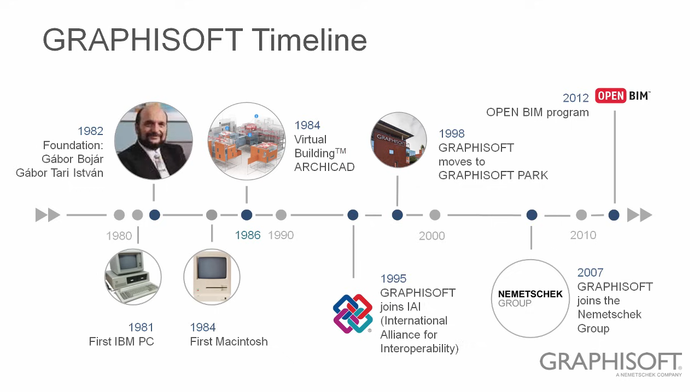This slide shows some important details in the lifetime of GRAPHISOFT. You can see the portrait of our founder, Gábor Bojár, who already in 1982, one year after the commercial introduction of the very first personal computer, succeeded to write a computer program for 3D modeling and clash detection on a PC. Soon after, our founder discovered that the best customers for his invention were architects. So ARCHICAD, the first BIM application for architectural design, was born. Only at that time, we called our method virtual building and not building information modeling.

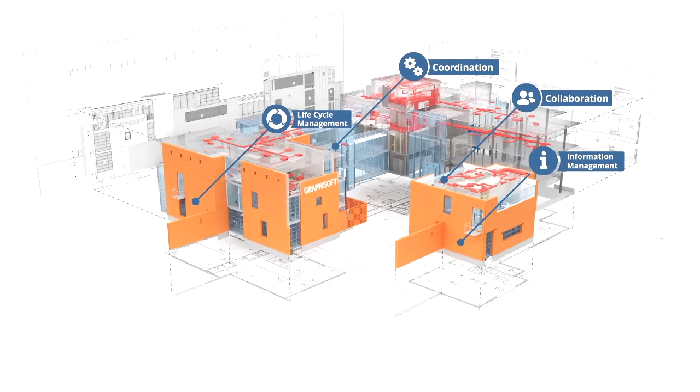What do we mean by BIM? What is building information modeling? Well, according to the AIA, BIM is mainly concerned with the digital representation of buildings, but also has many other aspects, like shared information, where you collaborate with different stakeholders of the construction project throughout its entire life cycle. In my presentation, I will try to cover all these aspects and show you how you can do building information modeling with GRAPHISOFT solutions.

GRAPHISOFT's solution ecosystem is all about building information modeling. ARCHICAD, our BIM authoring tool, is the preferred design tool of more than 200,000 architects worldwide. BIM Server and BIMcloud are solutions for smooth and intelligent collaboration for architectural design teams of any size. With BIMx, for BIM data access, our award-winning mobile application, even non-professionals can easily access and view the BIM models which were created by ARCHICAD.

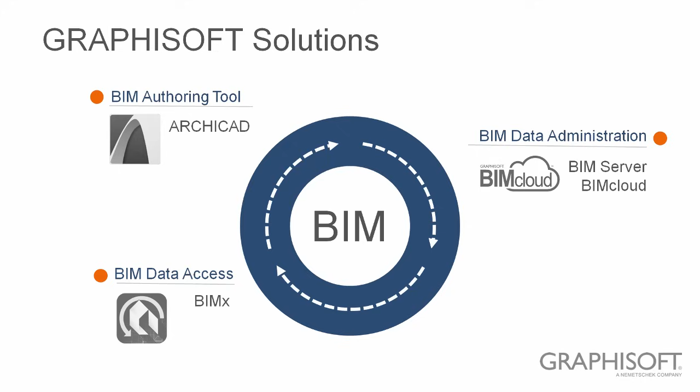Let me start my presentation with BIMx. You might have noticed I have already been showing you these slides in BIMx. BIMx is also a great presentation tool. You can freely download it from the App Store.

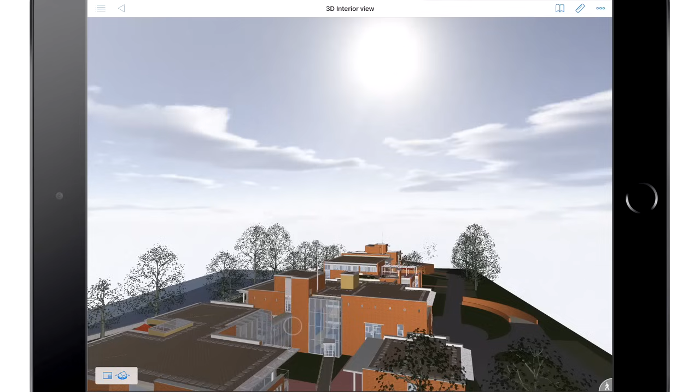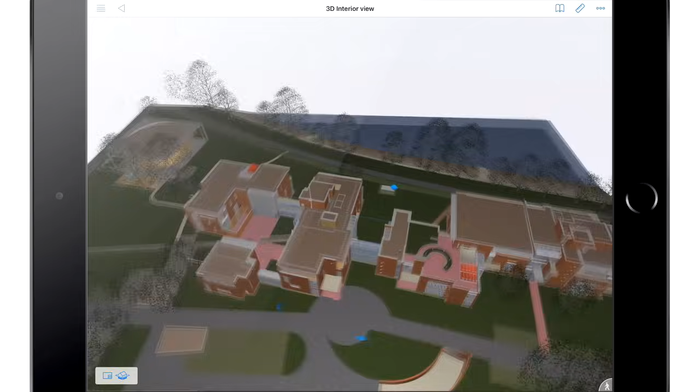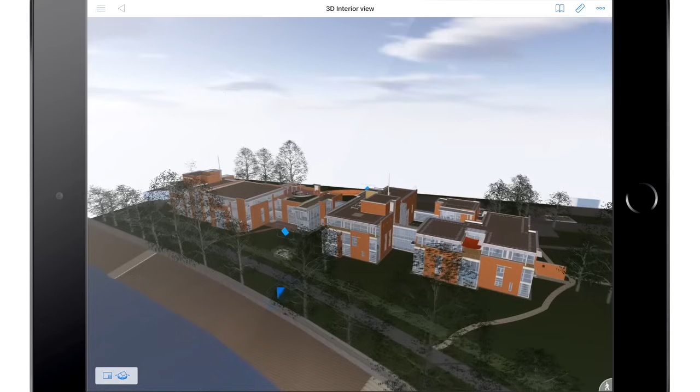I'm just switching to the 3D model to show you our headquarters in Budapest. These are the two buildings where all the software development of our superb products is taking place. The facility comprises two main buildings designed by two famous Hungarian architectural firms, Építész Studio and Lukács and Vikár Architects.

See how easy it is to visualize the BIM model and orbit around. With the pinch zoom, you can explore any detail from the outside or from the inside. Let's zoom a bit closer to the front door.

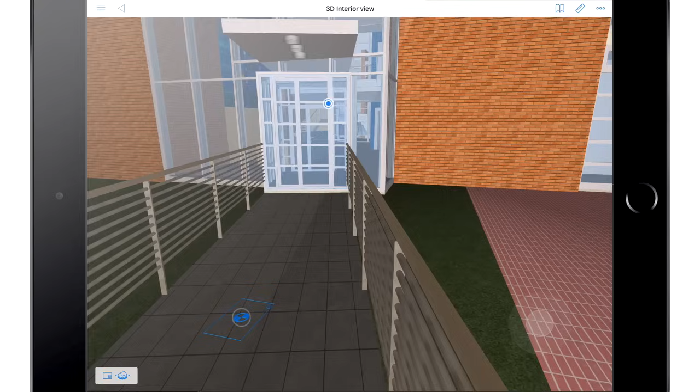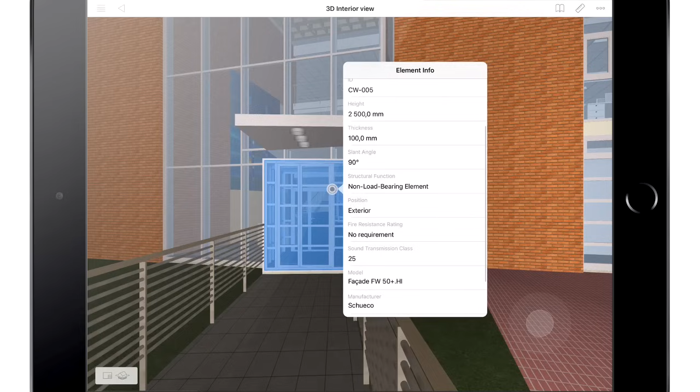Building information modeling is all about information. You notice a rich set of metadata can be attached to the model elements. Even web links can be attached to building elements in ARCHICAD. These can take you to the manufacturer's website for further information about the end product. These capabilities make the BIM model the perfect information management platform for the entire life cycle of the project.

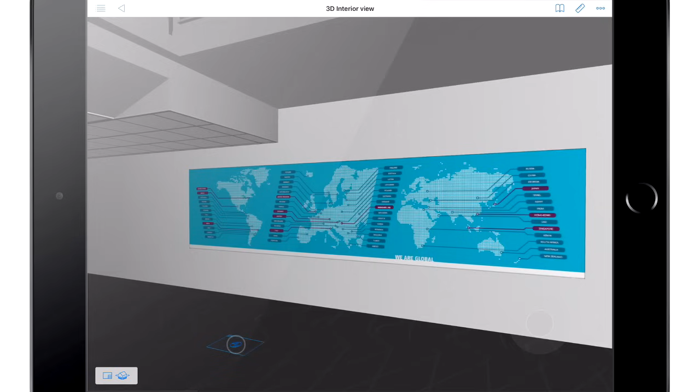Let's go inside the building. You can easily walk around just as if you were playing a computer game. This map shows all the locations in the world where we have direct or indirect representations. Let's walk upstairs. These virtual tours help clients better understand the design and get familiar with the relations between interior spaces.

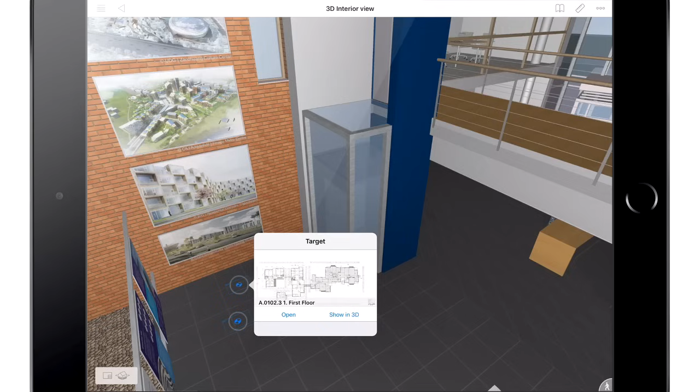Please note these great projects on the wall. All these buildings were designed with ARCHICAD by famous architectural design offices such as BIG, UDG, and others.

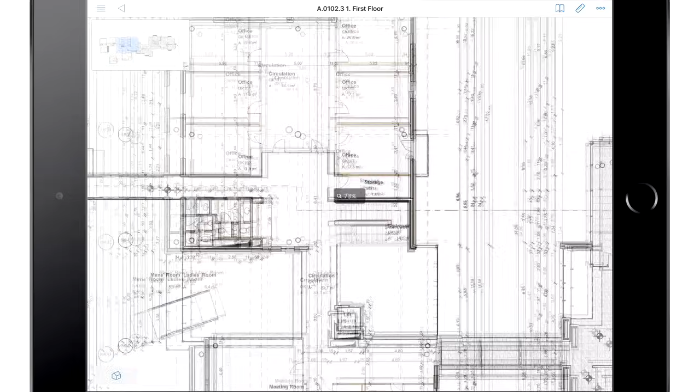Not only the 3D model, but also the entire construction documentation can be stored and viewed in our BIMx app. It means paperless construction sites. Construction managers can just walk about the construction site with an iPad in hand, having the entire construction documentation at their fingertips.

A unique feature of BIMx is that any 2D document can be placed in context of the 3D model, and the 3D model can be cut by the 2D document. This allows for much better understanding of the 2D documentation when viewed together with the 3D model.

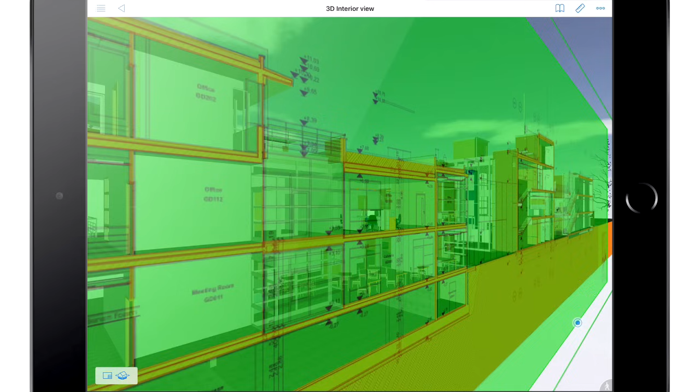In this section view, it is much easier for non-industry professionals to understand the 2D information when the section is placed across the 3D model. You can also move the 3D cutting plane to reveal the interior structure of the building at any location.

Now that you have seen how simply you can access and view the BIM model in BIMx, let me show you how easily you can create the BIM model in ARCHICAD. Firstly, I would like to show you that ARCHICAD is a true BIM authoring application. Then I will show you that ARCHICAD is very intuitive and you can have lots of fun while working with it. Lastly, I will give you everyday examples for how you can boost your productivity when working in ARCHICAD correctly, in the BIM way. Let's see now what it means to work in ARCHICAD in a true BIM fashion.

This is the same 3D view which you have seen in BIMx. We are just now in ARCHICAD.

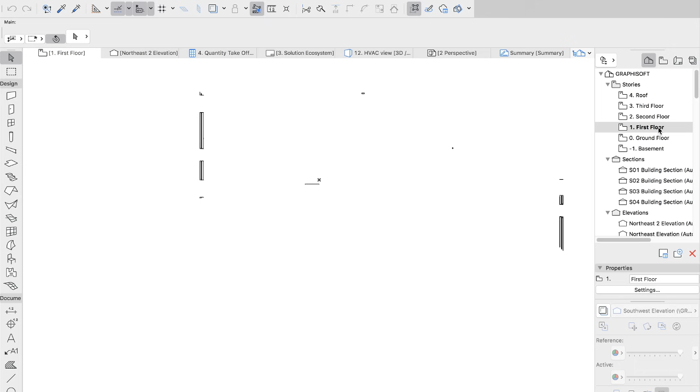Having a building information model in ARCHICAD means all the project-related documentation is stored within a single project file. The Navigator tool allows you to easily overview and access any part of the documentation. For example, in this case, I am browsing among the floor plans, sections, and elevations.

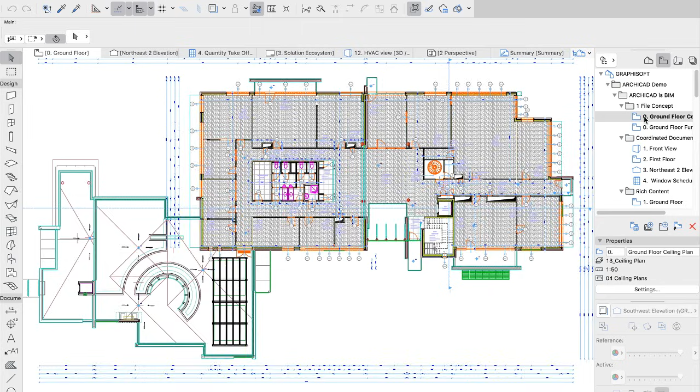The information and its graphical representation on a view depends on the architectural context. For example, the false ceiling plan has completely different content and style of representation than the furniture layout.

Navigator allows you to save and organize the different views of your BIM model in a fully customizable folder structure so that you can quickly access them at any time.

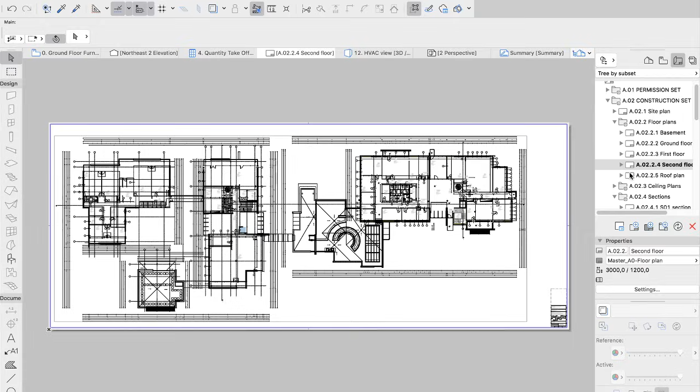Not only the building model related information, but also all the relevant drawings, schedules, and layouts are stored in the project file. All the drawings which make the architectural documentation complete are also an integrated part of the ARCHICAD project. In Navigator, the layout book lets you create and organize your final architectural layouts in any fashion you like.

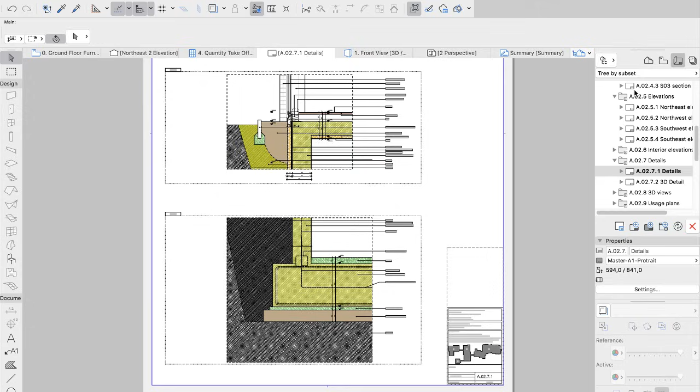The most important aspect of building information modeling is that all of the documentation, all of the different views, are live links to the central building information model.

Therefore, you need to make a modification just once in a view, and all other views update instantly. Your documentation stays coordinated at all times. Let's look at an example.

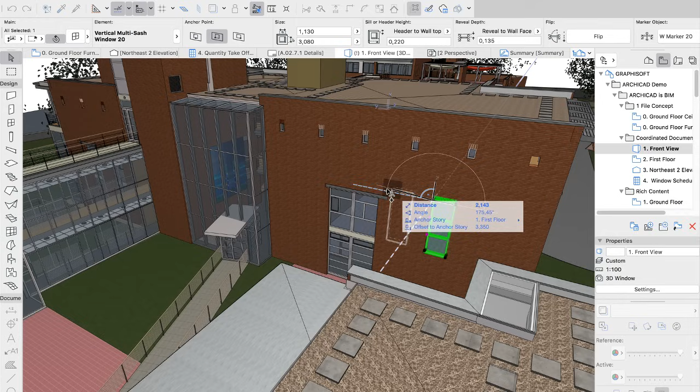You can modify the BIM in any view you like. Let's create a copy of this window right here in the 3D perspective view. As you can see, it is a very simple exercise. You can easily work accurately in the perspective view with help of ARCHICAD's guidelines.

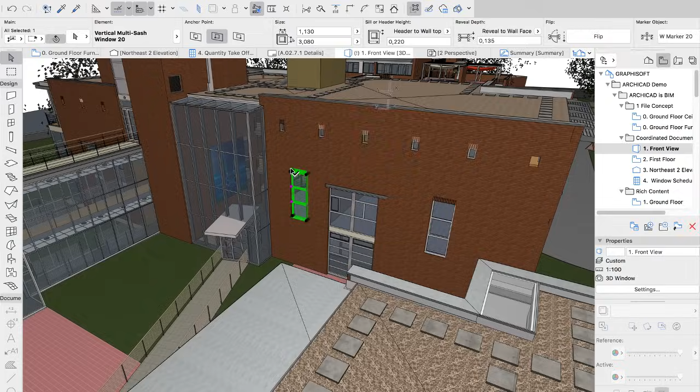Now let's have a look at the floor plan. As you can see, the window we duplicated in the 3D view is showing correctly on the floor plan. Let's see how easily you can further fine-tune this window.

Windows, doors, and objects in ARCHICAD are parametric library parts. One object can store a complete product range. They can represent plenty of variations of a construction element. You can comfortably edit the different window parameters through a user-friendly graphical interface.

Let's modify the number of window panes and the bottom pane height. Building information modeling means, in addition to the physical parameters, you can store a rich set of metadata with the building elements. For instance, in case of this window object, we can access its fire resistance rating, sound transmission, and many other important properties.

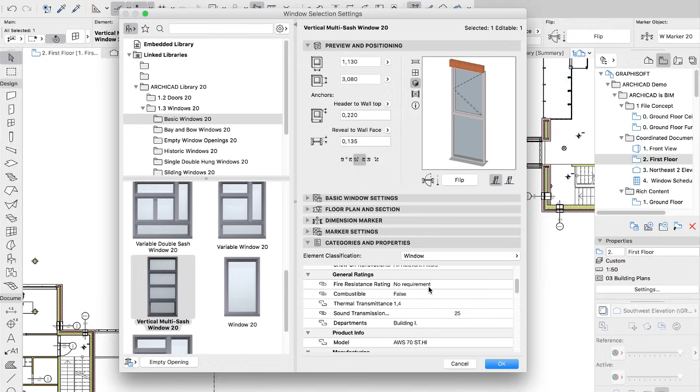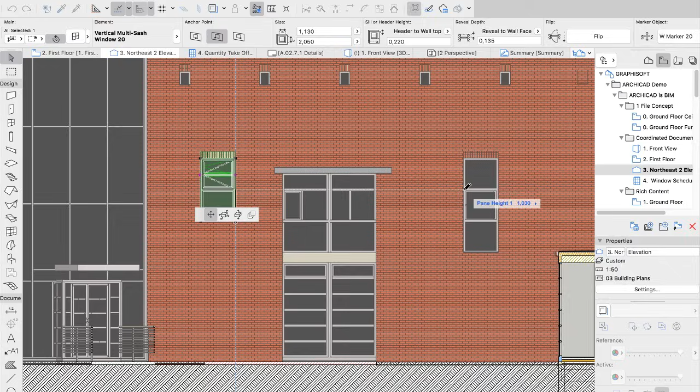The geometry of a window can be edited graphically in the 3D window or in an elevation view. For example, I can easily stretch the height of this window or change its transom height to align with the other. Graphical editing makes the use of ARCHICAD really enjoyable for architects.

At any stage of the project, you can instantly extract any information of the building information model as lists or schedules. Even graphic schedules can be created. Let's take this window schedule as an example.

Just like in any other views in ARCHICAD, you can edit the model elements also in schedules. Let's change the height of this window to be exactly the same as this other window, 3 meters and 8 centimeters.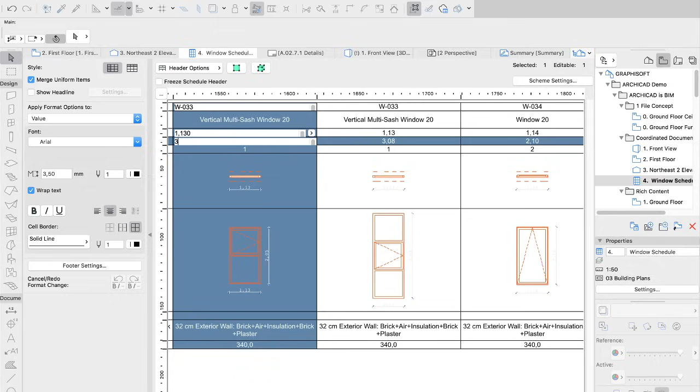Let's check our elevation. As you can see, the elevation has been updated and the window height has been changed.

You now probably realize how much time and effort can be saved by working in a real building information modeling fashion. You only have to build up your building information model once, and any changes you make will be automatically updated in all other views instantly.

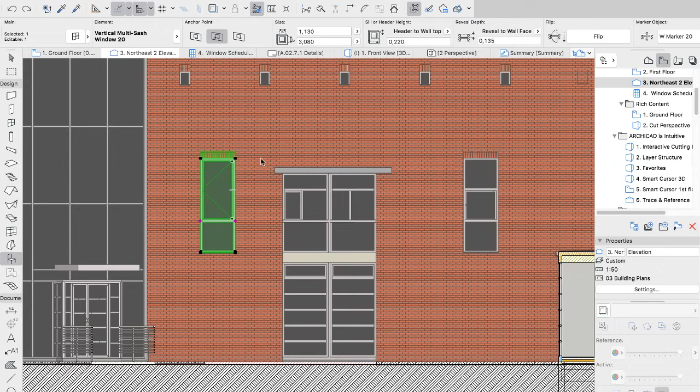ARCHICAD offers a huge productivity gain compared to traditional 2D CAD-based workflows. ARCHICAD significantly reduces the time spent on project modifications.

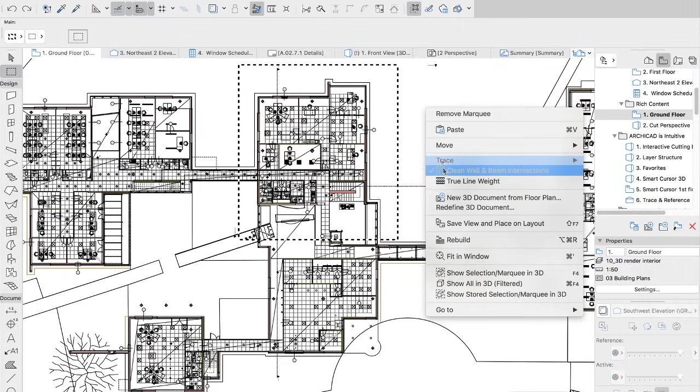Another important aspect of a BIM application is the type of local content that comes with the software, and how easy is it to customize these ready-made construction elements. To check this out, let's first visualize only part of this model with help of the marquee tool and furnish the entrance hall with some seating furniture.

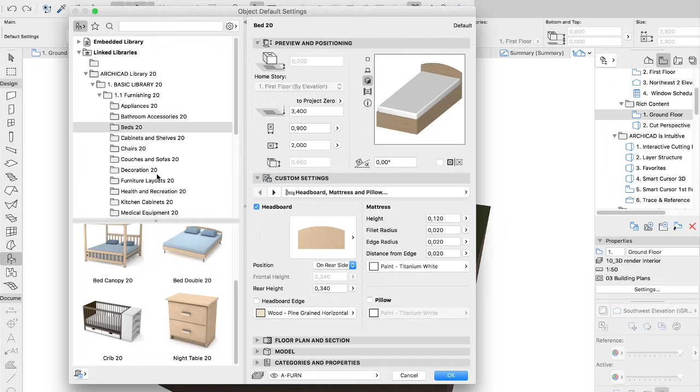ARCHICAD comes with a pre-installed library of more than 1,000 generic architectural elements. These objects are parametric in their finest details and are customized to your local standards. Through changing their parameters, these elements can represent numberless different products, all in very compact file sizes, due to the smart GDL programming language invented by GRAPHISOFT.

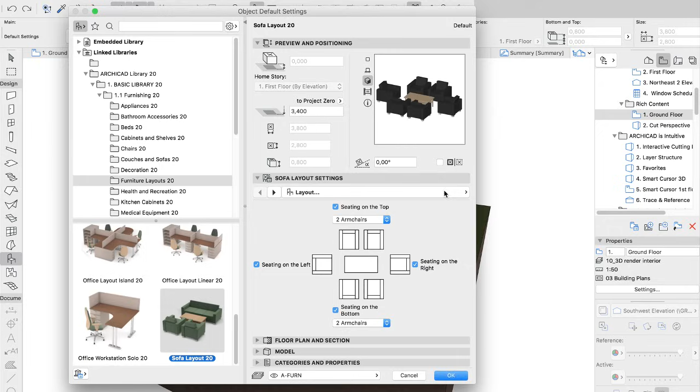For example, let's change the layout of this furniture piece. You can easily modify the number and type of sofas on each side. Let's have 2 armchairs on the top side, just like we have them on the bottom side. Besides the geometry, 2D representation as well as the materials of the objects can be freely customized. Let's change the materials of the armchairs to be leather. And voila! With only a single click, you can place the object into the entrance hall.

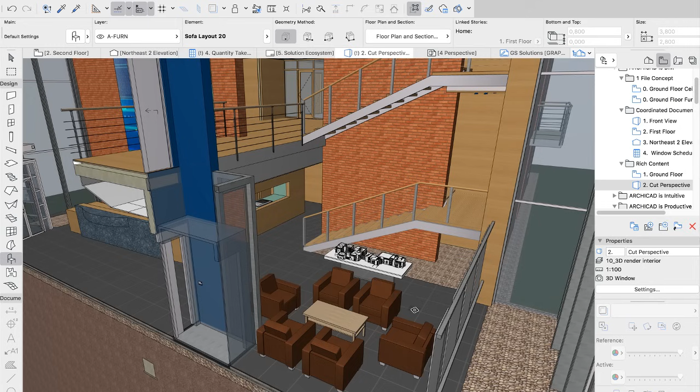So far, I have shown you the essence of what it means to work with ARCHICAD, a true BIM authoring tool. You have seen how much time and effort can be saved when working with a building information model. In the next part of my presentation, I would like to show you some intuitive solutions that will make working in ARCHICAD lots of fun. After all, it is very important that you like working with the tool you spend most of your day with.

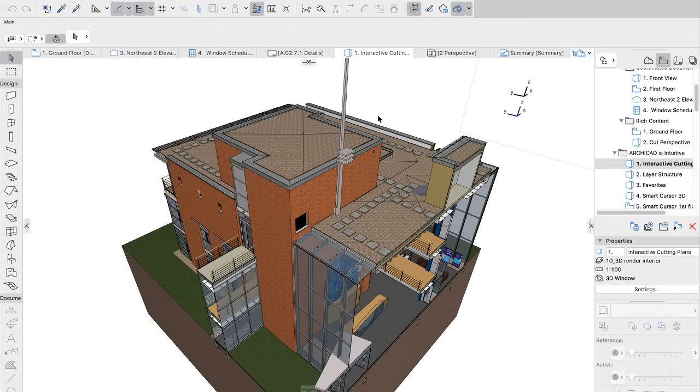When elaborating a small portion of a large model, it is imperative that you can easily cut down the model to the actual part you want to be editing. Interactive cutting planes provide a simple way to reveal the internal parts of the model. Besides its practicality, it is also very spectacular and fun to use, isn't it?

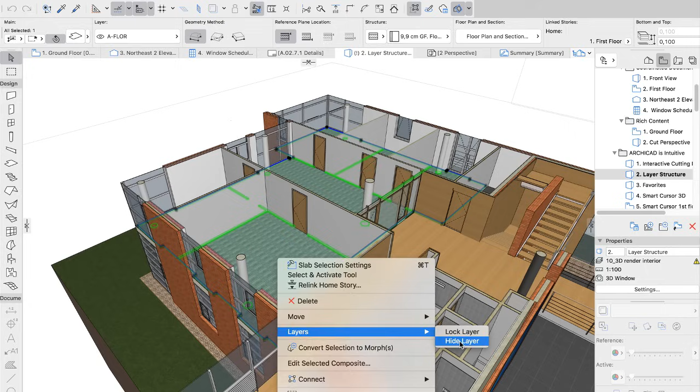ARCHICAD has a layer structure, which can be very helpful in organizing information in a logical manner. With the help of switching off layers, you can quickly eliminate the model content you do not want to work on. Layers also help AutoCAD-based offices to convert their office standards to the new BIM environment.

ARCHICAD is known for its user-friendly BIM modeling solutions. Let me illustrate it with a little exercise. Let's divide up this office and place a partition in the middle.

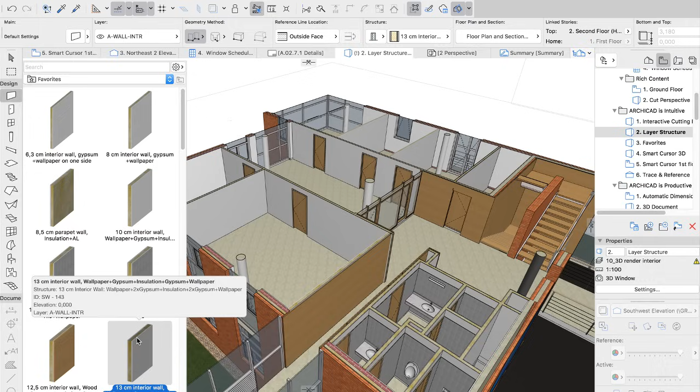You can select the type of wall you prefer with the help of ARCHICAD's Graphical Favorites functionality. A favorite stores all the parameters of an ARCHICAD tool. Thus, it helps a lot to promote standards within the architectural office. Like in this case, the partition is made up of a double layer of plasterboards.

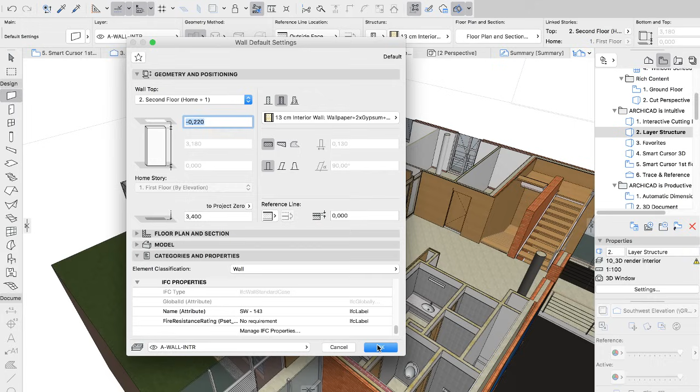Building information modeling also means you can store additional data with your model elements. For example, all the exact physical characteristics of the wall can be detailed and stored with the Wall tool.

To work in ARCHICAD accurately is simple in any view. With the help of the Smart Cursor and intersection points, you can easily snap to any elements, like in this case, the halving point or the perpendicular point.

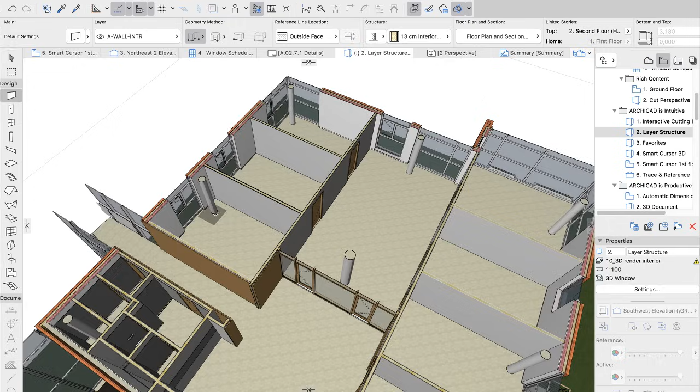Let's have a closer look at this T-junction. The buildup of our newly placed partition is different to the other partitions. We do not need a double layer of gypsum boarding. How can we change this partition to be exactly the same as the others? In ARCHICAD, there is a smart way of picking up the parameters of an element and transferring them to another. With the help of the pipette, you can just click any element to pick up its parameters, and with the help of the syringe, you can transfer them to another element. It's so easy to instantly modify elements.

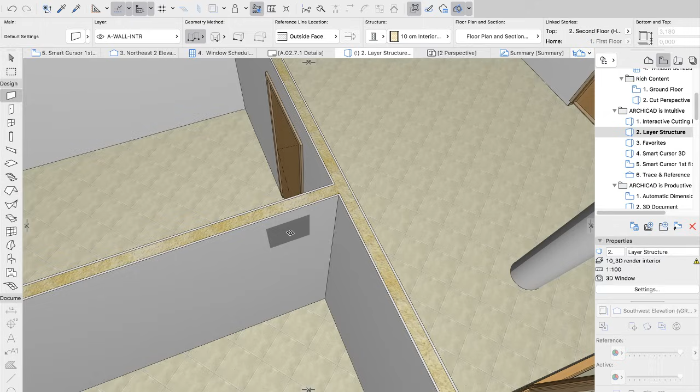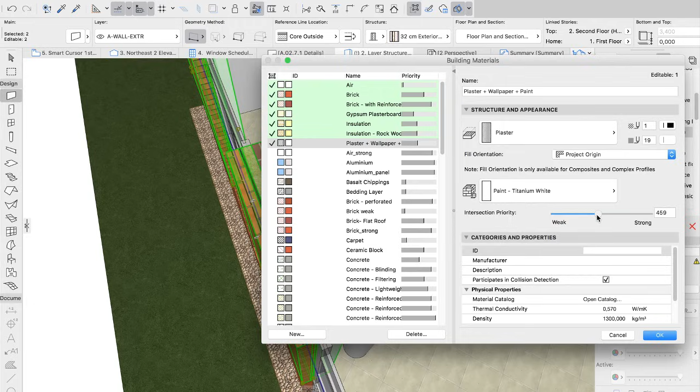Now let me talk about the accuracy and the level of details in ARCHICAD. Let's see the other end of this partition and examine its connection with the external wall. As you can see, the wall composites are not connecting properly. The gypsum boards are cutting into the plaster of the external wall. This is easy to change since intersections in ARCHICAD are handled automatically via building material properties. Just select the two composites and adjust the intersection priority of the plaster to be stronger. Here it is. The wall junction is now correct.

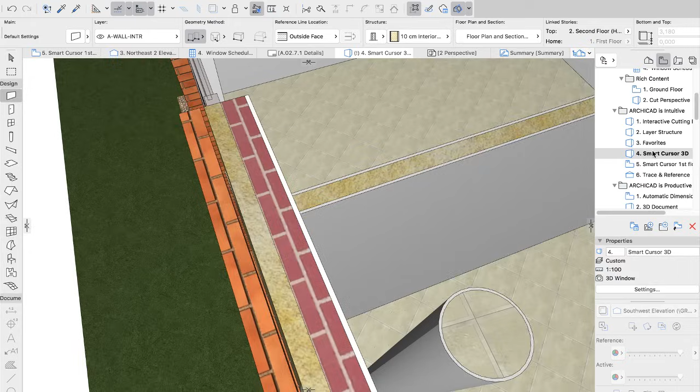Intersection priorities, based on building materials, make sure the connection of composite structures will be 100% correct on all views of the project. Furthermore, the bill of quantities extracted from the BIM models will be very precise, allowing the contractors to achieve a high level of accuracy in their cost estimations.

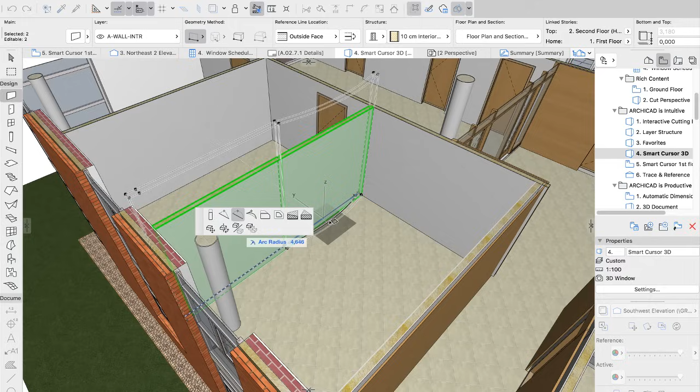Next, let's edit the boundary of this wall. In ARCHICAD, there is a consistent and really graphical method for editing BIM elements. The Pet palette is at your fingertips when you need to quickly edit a placed item in ARCHICAD. Let's create a curve on this wall segment here in the 3D window.

The Pet palette works similarly in any view. You can bend the other segment of this wall just like you did it in 3D before. With the help of the Pet palette, editing elements in ARCHICAD is easy and fun.

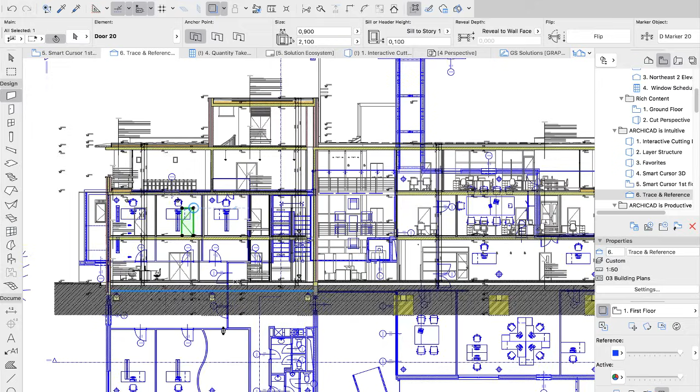While working in a section view, often you would need to see where your edited element is located on the floor plan. Trace and reference functionality allows you to trace your current view on top of another. I can instantly change the color of the traced view to have better visibility. Trace and reference is a great help, getting instant feedback about your edited element rather than having to switch between different views. Besides, trace and reference can also help you convert your existing 2D CAD drawings into real BIM models.

So far, I have shown you a couple of intuitive features that make your work in ARCHICAD so much fun. Now I would like to concentrate on those functionalities which will help you be more productive. At the end of the day, architects get paid for their design, and the end product of their design is the documentation. Let's see a few nice touches in ARCHICAD which will help you create documentation faster.

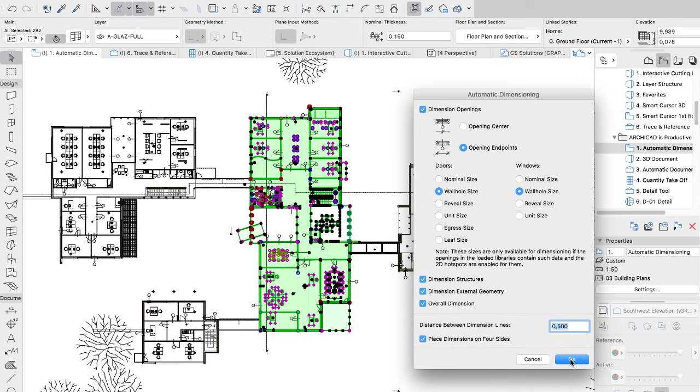First, let's have a look at dimensioning. Automatic dimensioning is a typical functionality which allows you to spend more time on design and less on repetitive documentation chores. You just need to select the elements you want to dimension, and ARCHICAD will do the rest for you. Of course, these dimensions are associative. They update automatically as you modify the dimensioned elements.

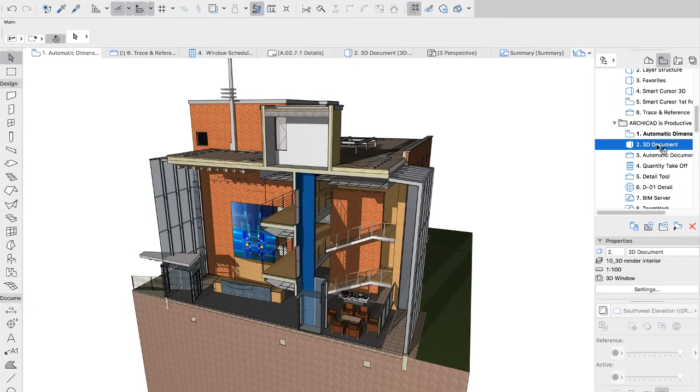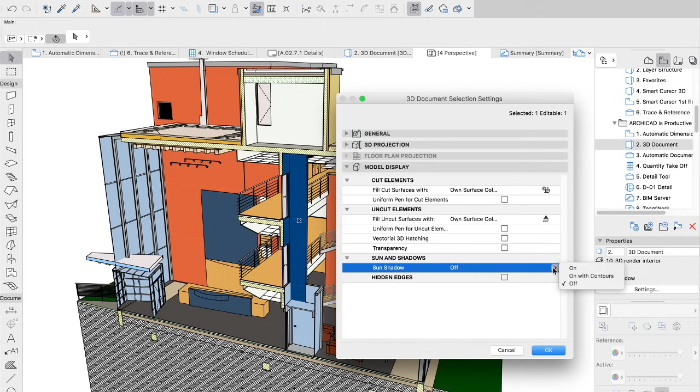There's another great time-saving functionality, the 3D document. One 3D view can tell a lot more about the design intent than plenty of 2D drawings. Therefore, 3D documents are really useful for conveying the design intent to clients or contractors. Let's see an example. To make the 3D view more plastic and beautiful, let's add a bit of sun shadows.

You can even add dimensioning within the perspective environment. Let's place a dimension line. As easily as this, you can dimension model elements in this perspective view.

Now let's place some labels. As you can see, the information of the model elements, like the building materials in this case, can be retrieved even in this graphical view. 3D documents enhance design communication with contractors and clients by revealing complex details of your buildings.

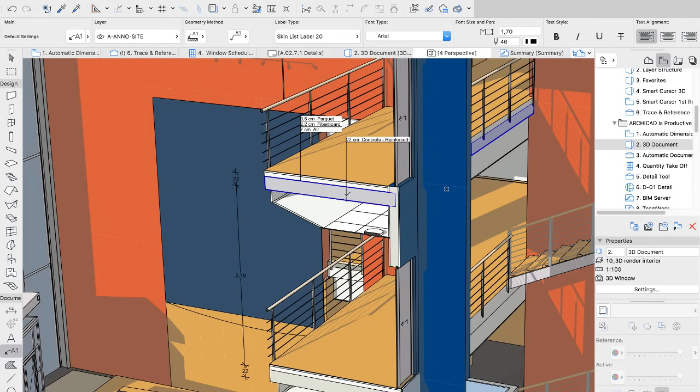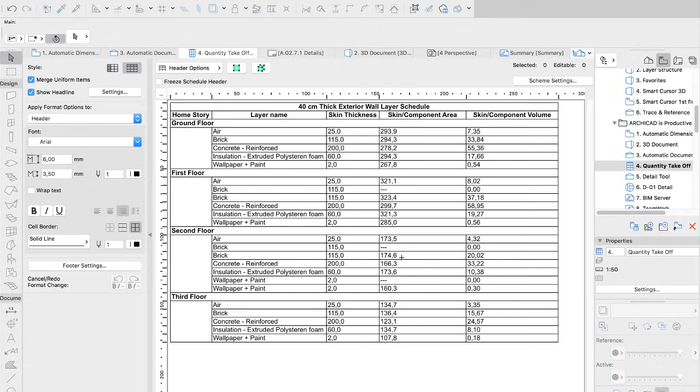Your 2D construction documentation can be automatically derived from the BIM without additional 2D drafting work. As a result of intersection priorities based on building materials, not only will the representation of construction elements be correct, but also the quantities derived from the building information model will be accurate. Exact quantity takeoffs can be created with just a few clicks.

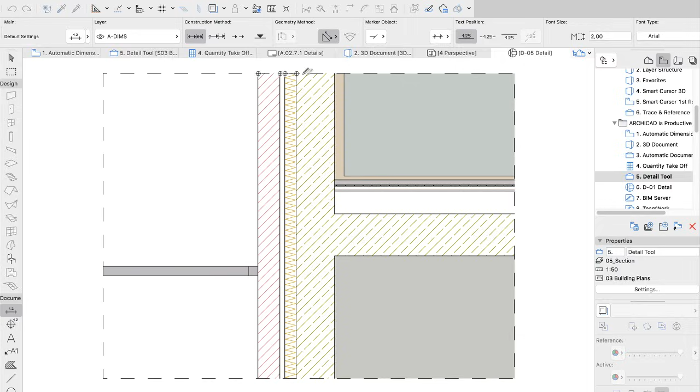When it comes to creating details at a larger scale, you can use ARCHICAD's dedicated detail tool. The model elements within the detail's boundary will be automatically clipped into the details window, and you can use ARCHICAD's complete 2D toolbox to finalize them. For example, you can just place dimensions on the detail, or like in this case, the detail was further elaborated with 2D lines, fills, and objects. No need to finalize your construction documentation in another CAD software.

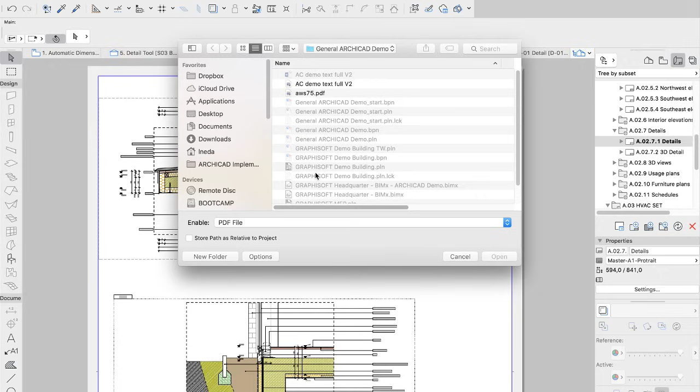When you have finalized the detail drawings, you can place them on predefined company standard layouts and arrange them with graphical methods. Note that these smart master layouts can manage automatic drawing numbering and naming. No need for tedious manual rework before publishing. You can easily incorporate any manufacturer's information within your documentation. Even PDF details can be placed on layouts.

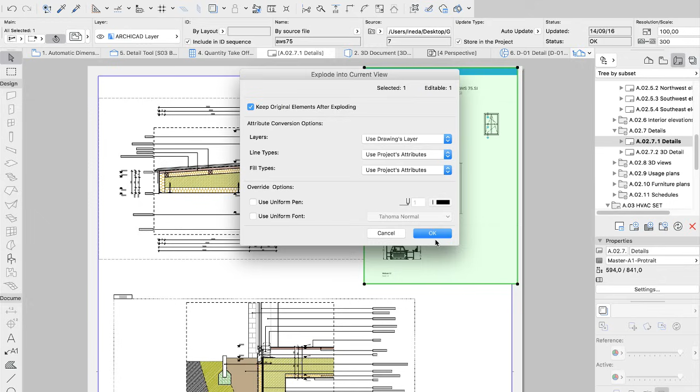You can also explode the PDF information into drawing primitives if you just want to use part of the detail. Like in this case, let's delete some of this window frame detail.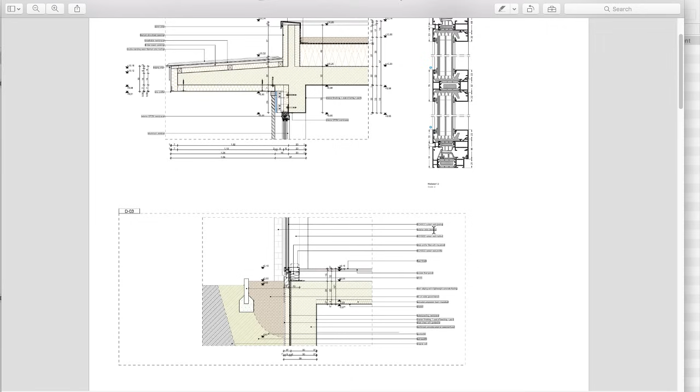To create the final documentation is a snap in ARCHICAD. You need to assemble the document set to be published only once. Any updated information is automatically represented on all the layouts, and the publishing takes just a click. In just a few seconds, you can browse the published documentation in the PDF document. In a very similar manner, you can publish DWG drawings, or if you prefer, you can print the entire documentation with just one click.

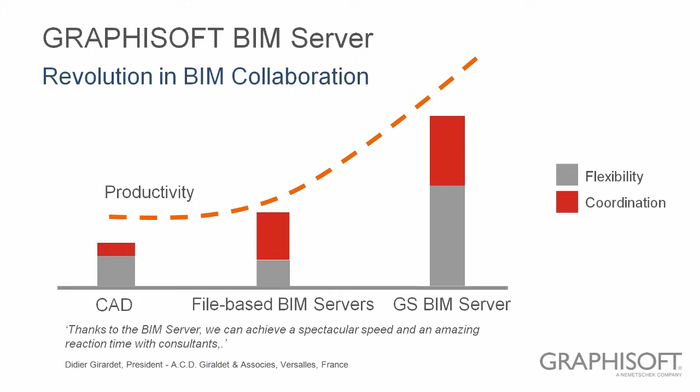Being productive in designing complex buildings means you need to work in a team efficiently. GRAPHISOFT's teamwork concept supports a revolutionary workflow in BIM collaboration. BIM Server allows the online sharing of the BIM model amongst the entire design team without limit on the number of team members. Due to the unique Delta Server technology, only the modifications travel through the network. It allows team members to efficiently join the shared BIM model even via the internet. No heavy hardware specs for the server computer or high bandwidth network is needed.

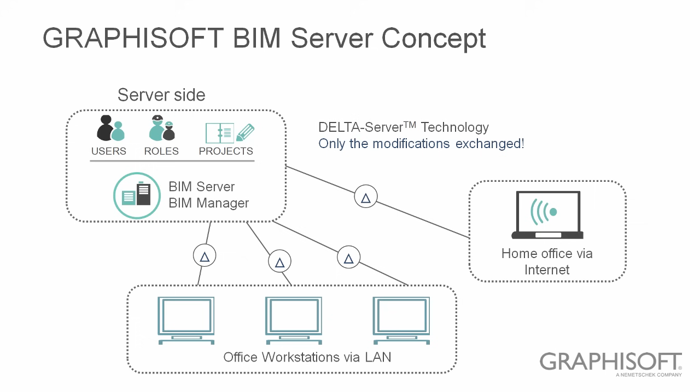Teamwork in ARCHICAD offers color coding to help with identifying the element ownerships. You can also use instant messaging to communicate with other team members in the context of BIM elements. Project managers can assign tasks to team members and precisely control the team members' roles.

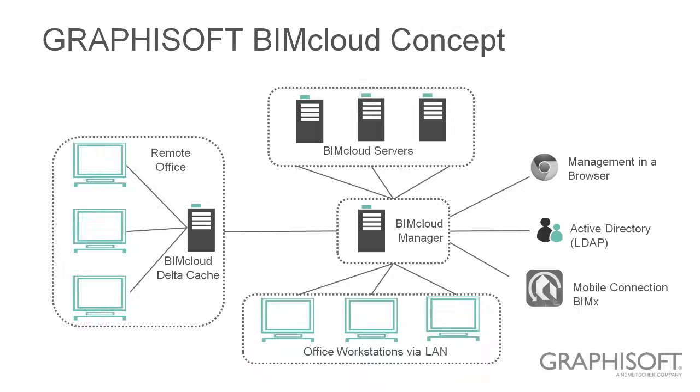For architectural firms having multiple offices working on large projects, we've developed our BIMcloud solution. BIMcloud enables multiple offices to collaborate via a common platform, the BIMcloud Manager. No problem if several BIMcloud server computers are deployed in several different locations. Team members from different offices can work together as if they were sitting in the same office side by side. Teamwork messaging via BIMx app can extend team communication even onto the construction site.

Architects need to coordinate the design of other disciplines. Building information modeling has advantages also in the coordination of disciplines. GRAPHISOFT advocates an open BIM program, which fosters BIM-based data exchange via open standards and workflows. Working via the open BIM method, designers of other disciplines are not tied to use a proprietary tool. Rather, they are free to select their own design tool based on their professional preferences.

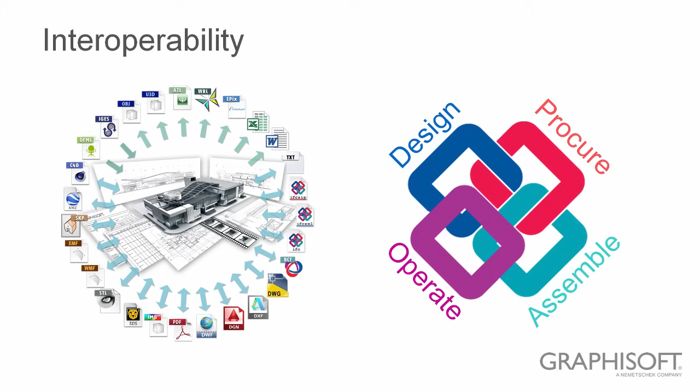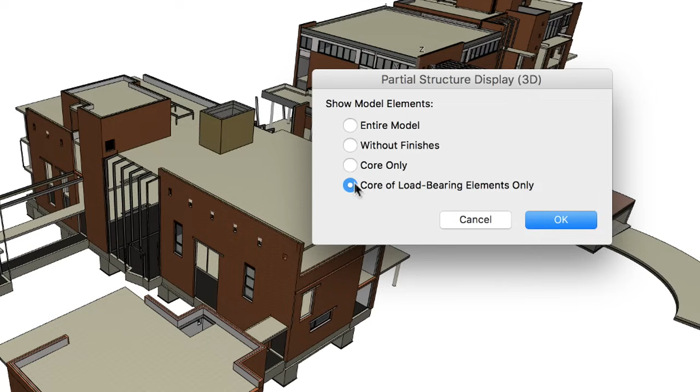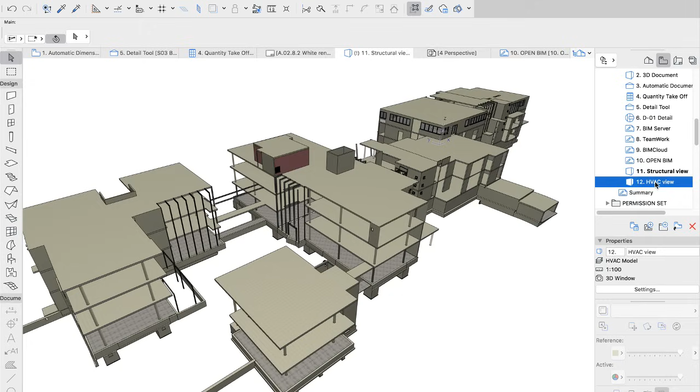To exchange data with other disciplines, you must be able to easily distinguish the discipline's BIM content in your BIM tool. Like in case of structural design, you should be able to visualize the structural part of the model easily. In ARCHICAD, there is a great solution for this: the partial structure display. This type of filtering is automatic and takes only one click. You can see in this view, now only the core of the load-bearing elements are visible. Having reduced down the model content to such a structural view will ease the collaboration with your structural engineer.

Likewise, in ARCHICAD, you can easily model or import complex HVAC systems to include them within your architectural model. This way, you can have a federated model which contains the HVAC model elements as well. Then you can easily coordinate the HVAC layout with the architectural design. Even clash detection can be carried out, analyzing whether HVAC elements clash with structural ones or not.

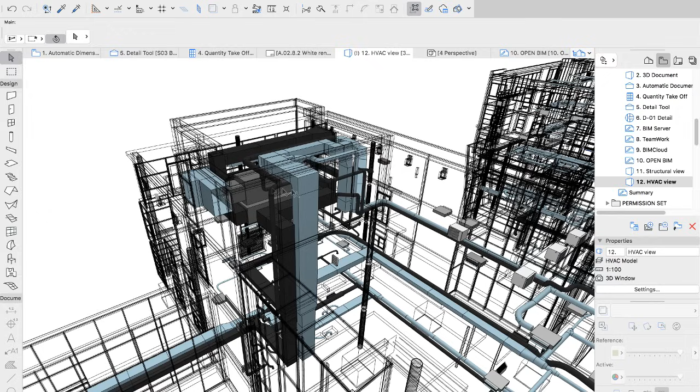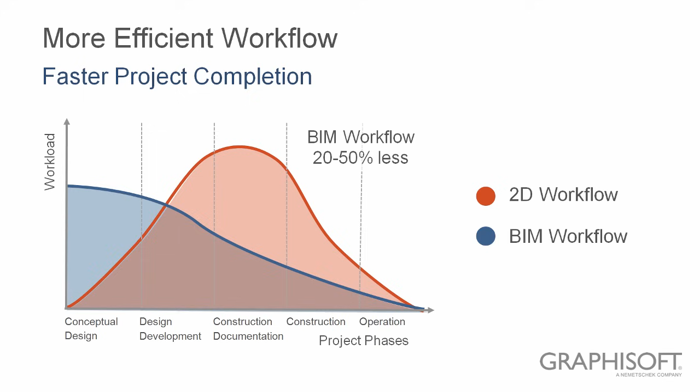This concludes my demonstration. I hope you liked what you've seen, and I have convinced you about the advantages of building information modeling over the traditional 2D CAD workflow. Overall, the BIM workflow provides you with a much more efficient workflow than 2D CAD workflows. According to the feedback from our customers, you can save around 20 to 50% of the total time. Besides, with BIM, you can control your project much more efficiently and decide about important design issues earlier in the development phase. This can result in less design errors and construction issues, more profit for all stakeholders, and happier clients.